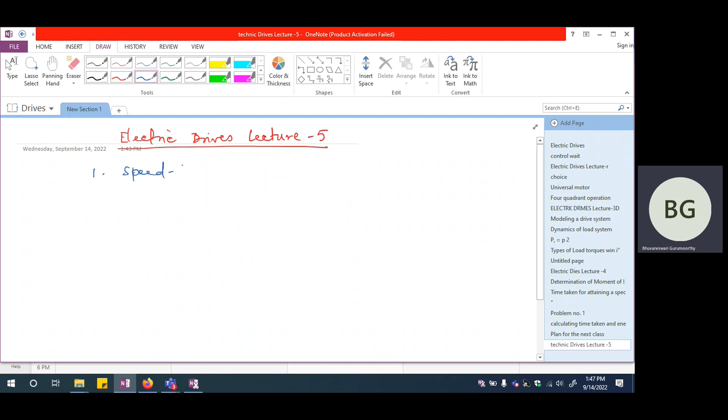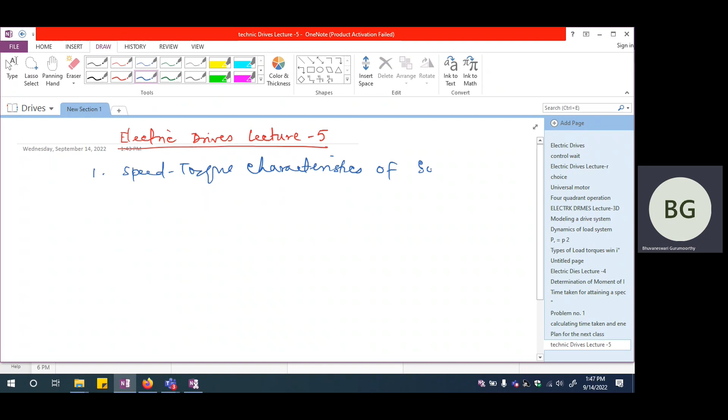We said in the last class that we are going to look at three things today. One is the speed torque characteristics of some practically existing systems, some practical loads. This is the first thing we will look at, because unless we know clearly how load speed torque characteristics behave, we will not be able to exactly meet the needs of that particular load. So for that purpose, we need to analyze what kind of load systems exist in actual practice.

The second thing we are going to look at is stability, basically steady state stability. Let's say a particular system is working at a particular operating point, and if there is a small disturbance occurring in the system, maybe due to a small variation in the load, or in the frequency, or some kind of hiccup in the coupling, in those cases, whether the operating point would be stable, that is whether the system would return to the same operating point irrespective of the disturbance. This can be examined by knowing the load speed torque characteristics as well as the motor speed torque characteristics. We are going to look at that as well.

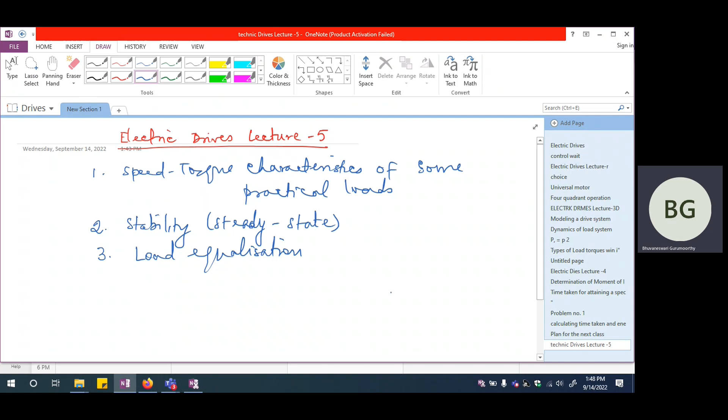And the third thing we are going to look at is something called load equalization. So these are the three things we are going to look at, and this should conclude our discussion on dynamics of the load system.

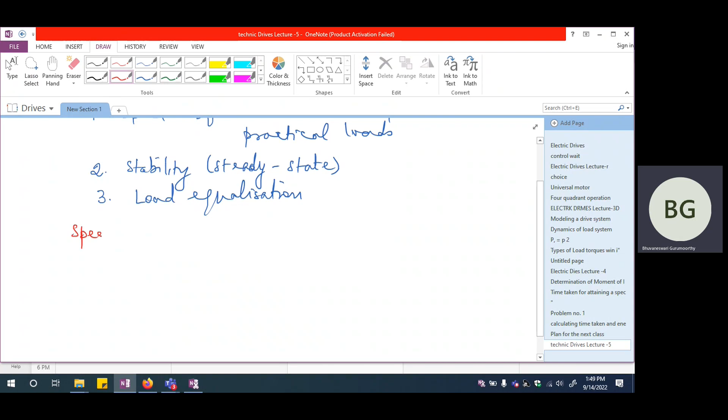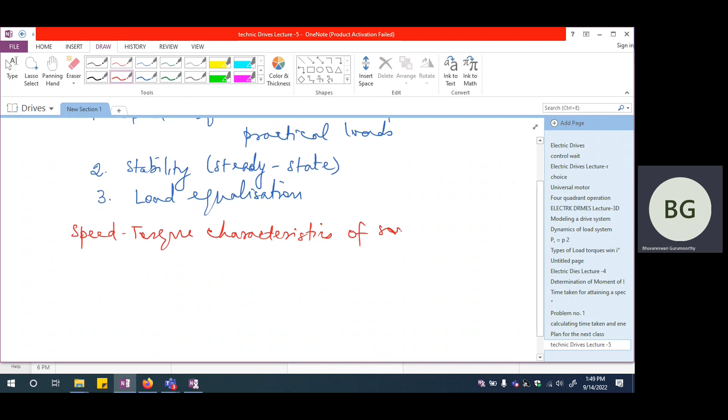So let us try to first of all start with the speed torque characteristics of some practical loads. So we are going to start with this.

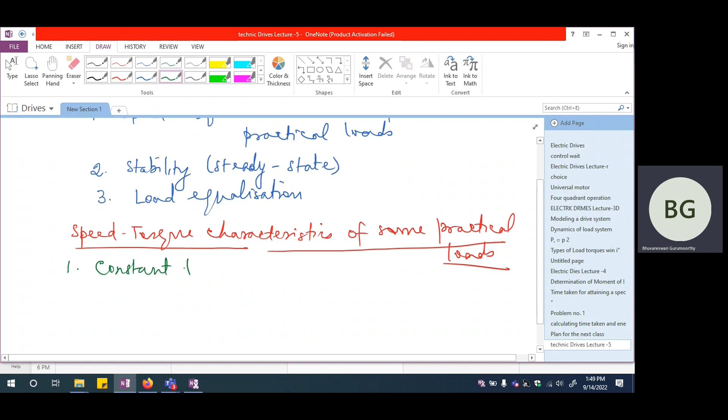We already talked about at least two kinds of loads. One we said is constant torque load, so irrespective of the speed at which the system runs, the torque posed by the load to the motor is going to be constant. Typical examples are gravitational loads, loads being lifted against gravitation, typically a hoist or an elevator, the lift. These are typical examples of constant torque load, because I'm assuming they move at very small speed, so it won't make any variation in the G value, acceleration due to gravity, and we are assuming it is in the Earth's environment. So a hoist lifting weight against gravity, or an elevator or lift, is typically a constant torque load.

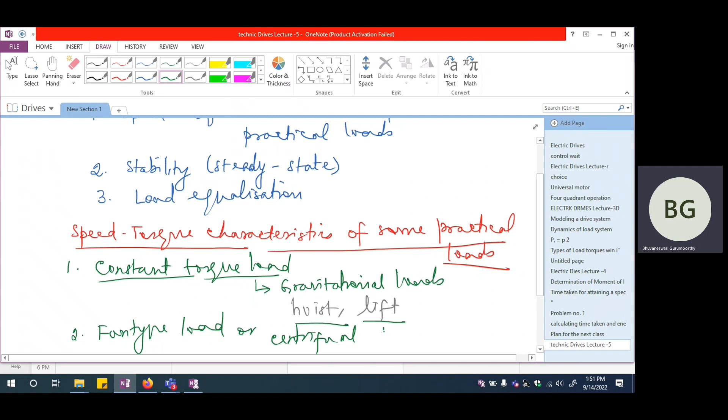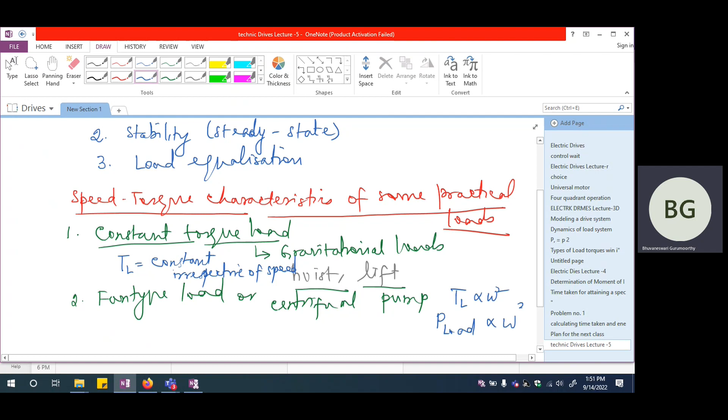Another load we talked about was fan type load or centrifugal pump kind of load. These are two loads where the load torque will be proportional to omega square. Here TL is constant irrespective of speed, since we are always talking about speed torque characteristics, this one is irrespective of speed, whereas this one is dependent upon speed. So the load torque is proportional to omega square, which means the load power is proportional to omega cube, because torque multiplied by omega gives power. So this has to be written as TL multiplied by omega.

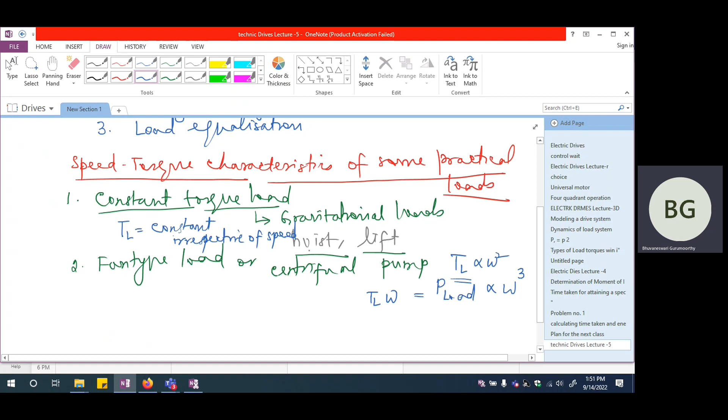Now there could be combinations of these torques. For example, if I look at an electric vehicle or a train which is moving, when you start the train, initially when it has to start moving, you have quite a bit of static friction faced by this load. After that, once the train starts rolling, the wheels start rolling, it comes down. And after that, it might actually increase as the speed increases further, if it's a high speed train, because it has to tear through the wind column and then progress further. So as it moves at higher and higher speed, the torque increases further and further. So if this is the frictional torque, static frictional torque initially, it decreases as the wheels start rolling.

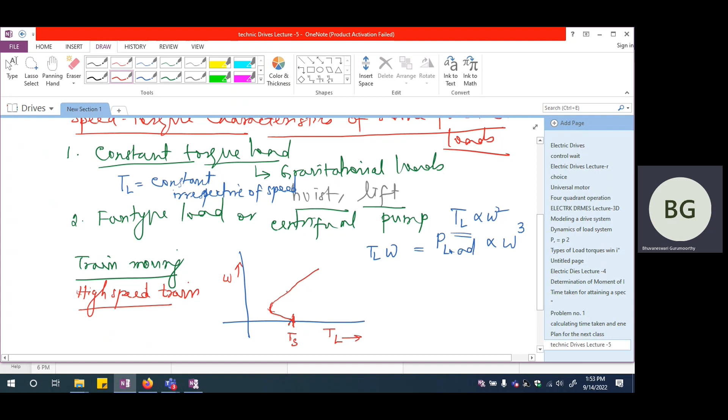And after that, it is going to increase further and further like this. So I should say this is the omega axis and this is the load torque axis.

This will be the corresponding variation of torque for a high-speed train. In the same speed-torque plane, if I plot for a constant torque load, the torque remains constant irrespective of speed. So this is the constant torque load characteristics.

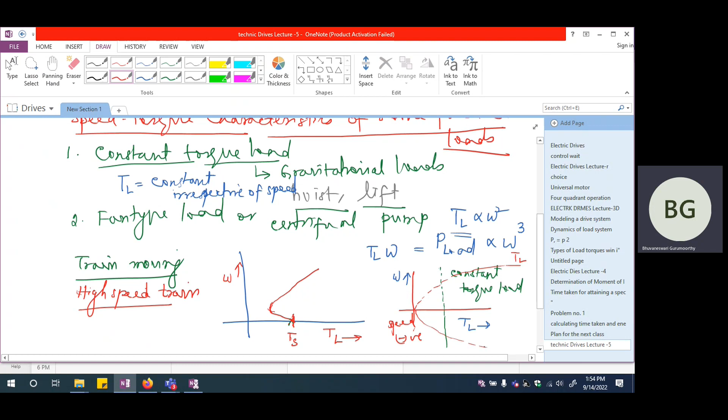Whereas for a fan type load, as the speed increases, the torque increases as the square of that, so it has to be parabolic. I should show it as a parabola. Still the torque will be positive, even though the speed is negative. So I'm going to have this as the load torque for a fan type load.

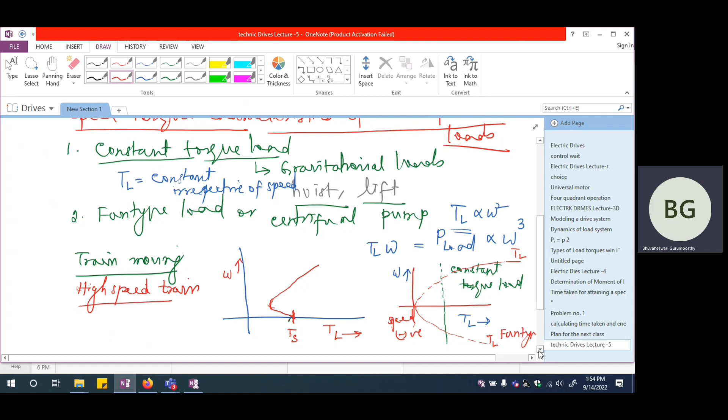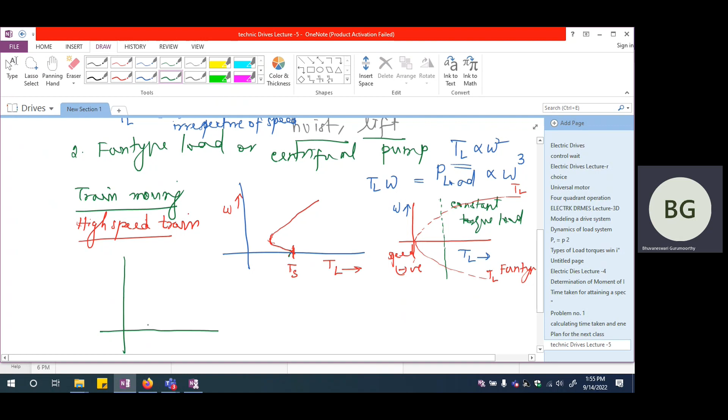Now, if I look at a system like an elevator in Sears Tower, the elevator moves at a very high speed. It has to tear through the wind column and travel fast, because if it has to reach the 112th floor within a couple of minutes, it has to move faster.

If it were just an elevator, I would have constant torque load characteristics, a straight line, TL equal to constant. Whereas the parabolic characteristics correspond to fan type load, which is the kind of characteristics we are going to have.

Now, this is the addition of both, because the elevator's weight is definitely there - the people traveling inside the cage contribute weight. But on top of that, I have to add the torque contributed by tearing through the wind. So I need to add these two together to show the complete characteristics.

So this TL is due to the weight of the cage plus the frictional torque due to the wind column - let me call this windage. Both of them put together give the torque-speed characteristics of a high speed elevator.

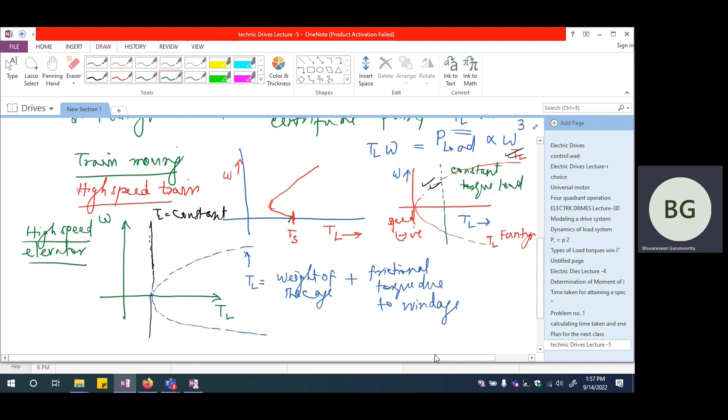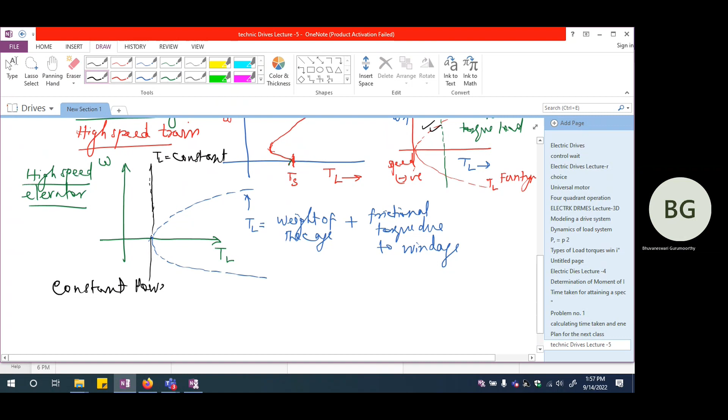There could be constant power loads, typically in a train that is coasting, just moving at roughly constant velocity. In those cases it has already attained a kind of steady state, so the motor has to produce only a constant amount of power. So constant power load is another type of load you may see normally.

In that case, if power is constant, T multiplied by omega is constant, which means TL is proportional to 1 by omega. If this is omega and this is the load torque, I'm going to have something like this - a hyperbolic kind of characteristics. That's the characteristics for a constant power load.

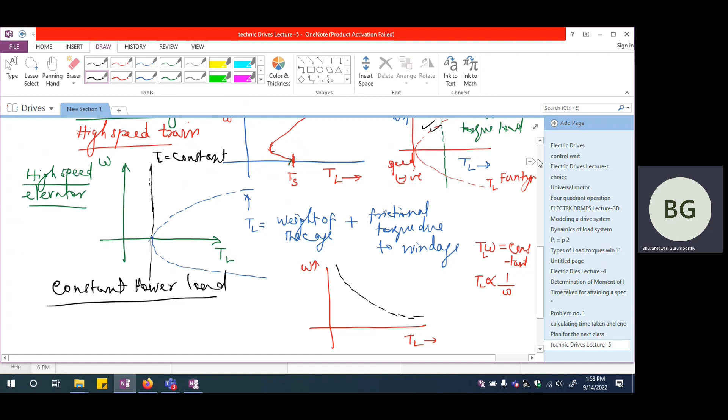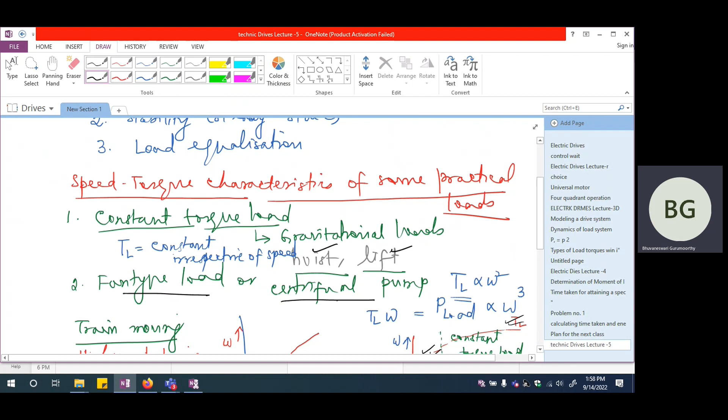So there are different types of loads encountered in real life. We took some of them: one is constant torque load, like hoist and lift, where the torque is constant irrespective of speed. Then the other is fan type load or centrifugal pump kind of load, where the load torque is proportional to omega square.

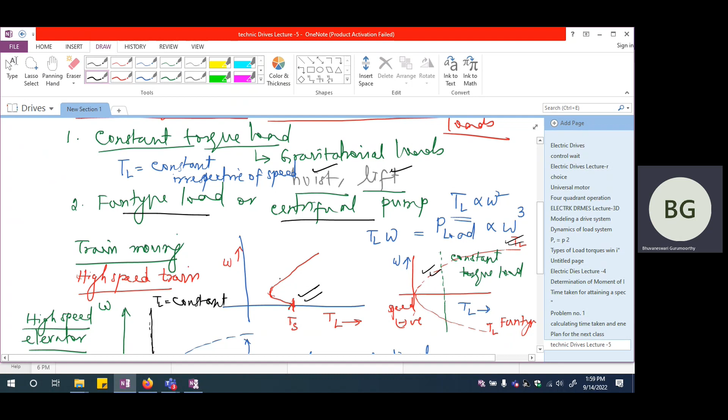Then there's the high speed train, where initially there's a good amount of static friction, but after that the torque demand declines, and then it gets added to the original torque requirement of the train, which is in the form of a parabola because it's a high speed train tearing through the wind column. Another one we talked about was high speed elevator, and finally constant power load. These are different kinds of load torques we may encounter in real life.

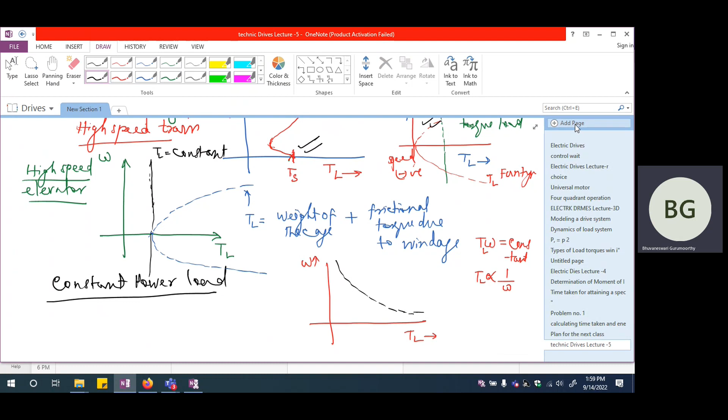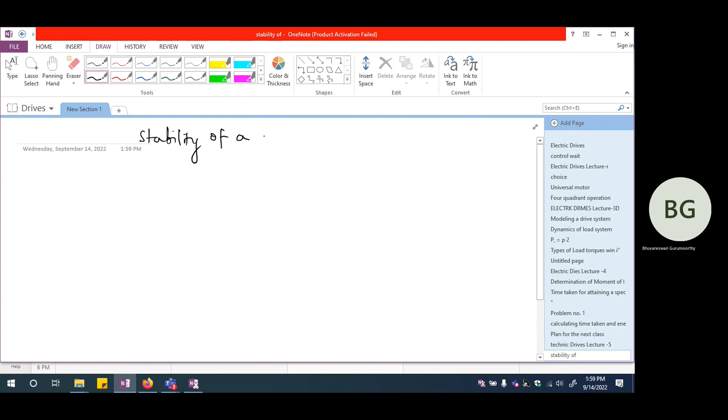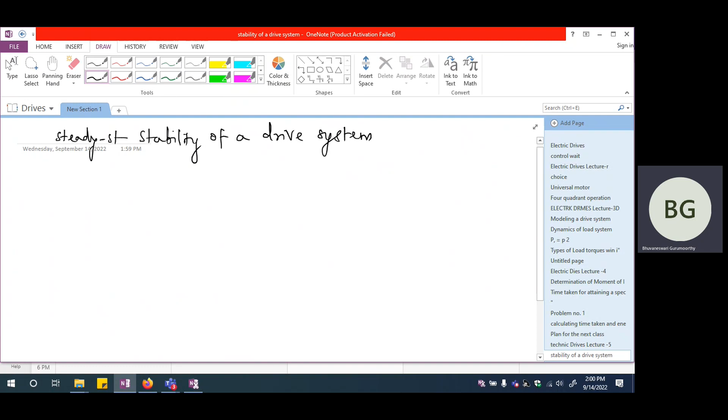So the next thing we are going to talk about is stability of a drive system. This stability is actually steady state stability of a drive system. So we are looking at steady state stability of a drive system.

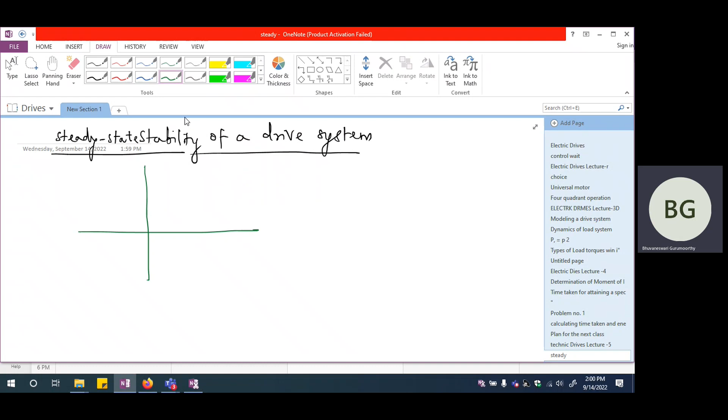So in steady state stability of a drive system, let us first look again at the speed torque characteristics of the load as well as the motor. Let's say this is omega and this is torque. I'm just writing torque because we'll specify whether it is the electromagnetic torque developed by the motor or the load torque demanded by the load.

Let's assume it is a three-phase induction motor. I'm going to draw the speed torque characteristic somewhat like this. So this is the speed torque characteristics of a three-phase induction motor. Let me show this as TE, the electromagnetic torque that is developed by the induction motor.

Now let me draw the load characteristics. Let's take a constant torque load, for example. So let me just draw this as a constant torque load, with a straight line characteristic. So this is TL.

Now, the operating point is where J d omega by dt equals TE minus TL, and this should be 0. When this is 0, that is where you get the equilibrium point obtained between the interaction of load and motor.

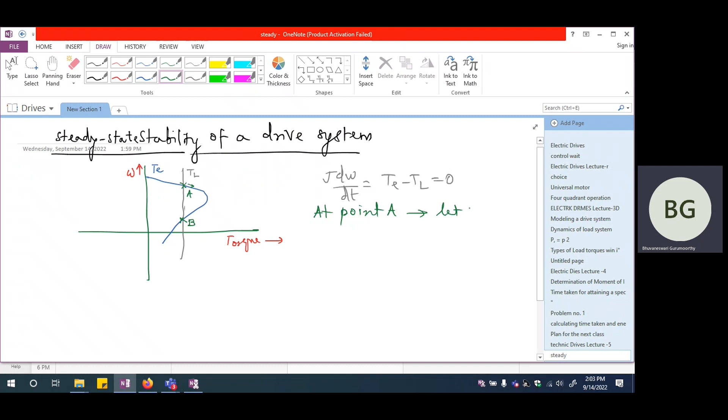Let's say there is a little bit of variation in the frequency. Maybe the frequency has decreased slightly in the grid, because of which there is a little bit of reduction in the speed. So at point A, when the system is operating, let there be a small reduction in the frequency. Obviously the speed decreases slightly, which means it becomes omega minus delta omega. This is the variation in the speed. When there is a slight variation in the speed, let's see what happens to the electromagnetic torque value and what happens to the load torque.

It's a constant load torque characteristic, so TL is constant. Even if the speed changes, TL will not change. But if I look at the electromagnetic torque value when the speed slightly changes, I will have a slight increase in the torque, by a quantity corresponding to delta TE. So TE increases slightly. Now TL remains the same, whereas TE has increased slightly. So TE minus TL is going to be delta TE, which is a positive quantity.

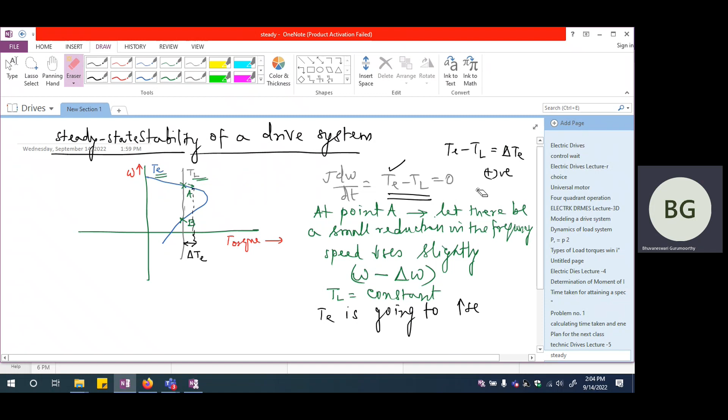If we get a positive quantity, which acts like an accelerating torque, then d omega by dt will be positive, so there will be an increase in speed. This is the direction in which the operating point will travel, so from here slowly it travels towards A. It had moved away from A towards reduced speed, but now it increases slightly because the speed has increased. The electromagnetic torque will get decreased to the original value, which will exactly balance with TL, so it gets back to point A and stays put there.

So point A is termed a stable point, or steady state stable, because even if there is a small disturbance, that disturbance will cause the difference between TE and TL to reach such a value that it drives it back to the original point A itself. That is why it is a stable point. On the other hand, let us look at point B. Let's say at point B we again have a slight reduction in the frequency.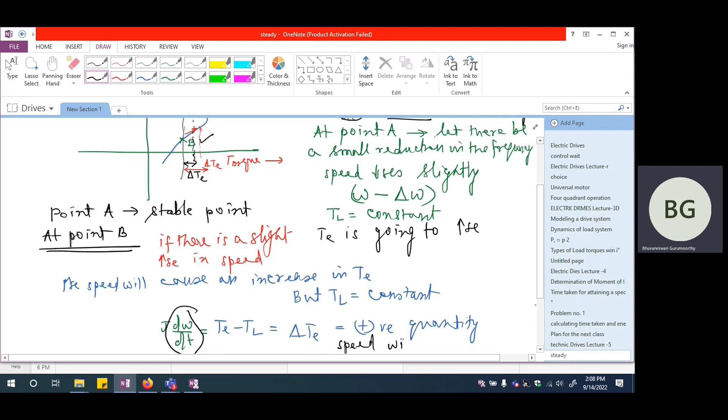Which is going to be a positive quantity. So if this is a positive quantity, corresponding to J d omega by dt, obviously I'm going to have a positive d omega by dt, which means speed will increase further. So if speed increases further, the operating point is going to move away from B. It will not move towards B, rather the operating point will move away from B.

Which means point B is not going to be retraced once again. The operating point is not going to return to B once again, which means point B happens to be an unstable point. So point B is an unstable point, because if there is a disturbance, immediately the operating point is going to be completely disturbed and the system is going to move away.

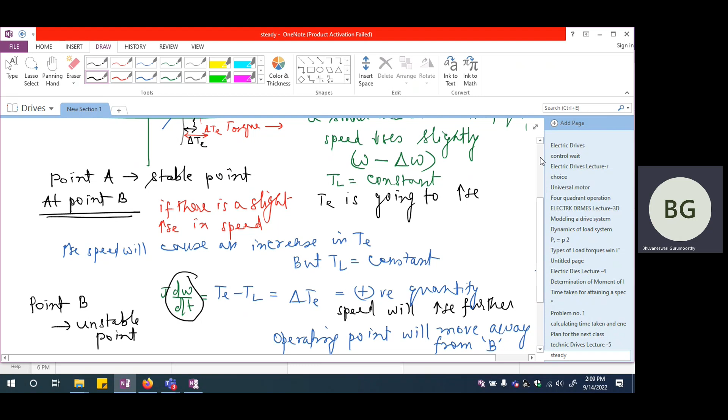So in this particular case, that is how induction motor starting happens, and ultimately it settles wherever the load torque equals the electromagnetic torque itself. That's why in the induction motor we always call the portion from torque equal to 0 to torque equal to T max point the stable operating characteristics, whereas from Tmax to the starting point where omega equals 0, we call this the unstable operating characteristics.

So this portion is generally going to be stable operating characteristics, whereas this portion is going to be unstable as far as an induction motor is concerned.

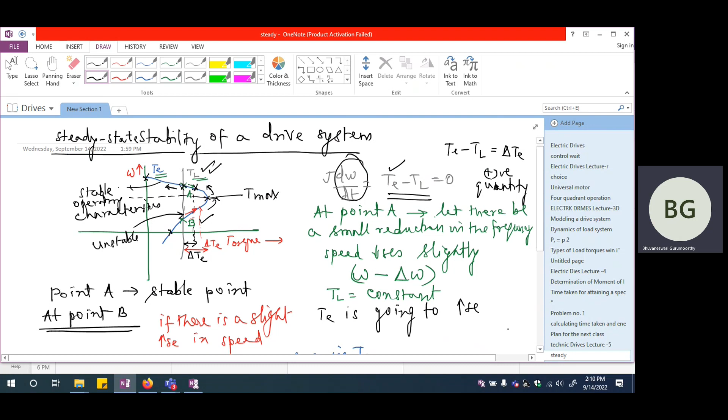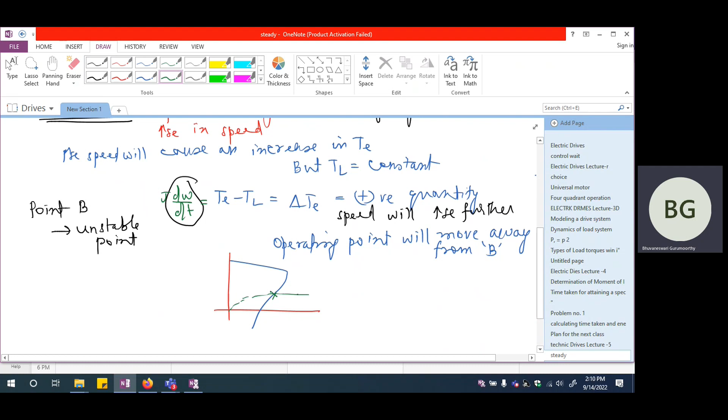But again, the stability or instability is not only dependent upon electromagnetic torque. It also depends upon what kind of load torque I am actually visualizing along with the electromagnetic torque of the motor. For example, even if I have a characteristic of the induction motor somewhat like this, if we have a fan type load intersecting with this end of the induction motor characteristics, which is normally called unstable, you may have a stable operating point coming up even here.

This point B may even be a stable operating point if this is a fan type load. So you need to examine clearly how the load interacts with the motor it is coupled to. Depending upon that, you can say whether a particular characteristic is going to be stable or unstable, whether a particular operating point is going to be a stable operating point in steady state or not.

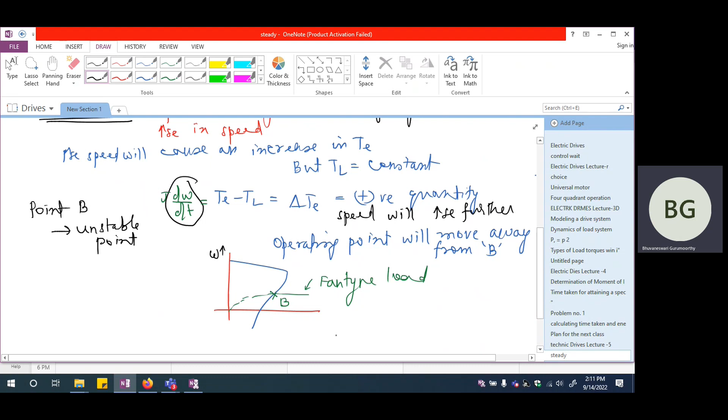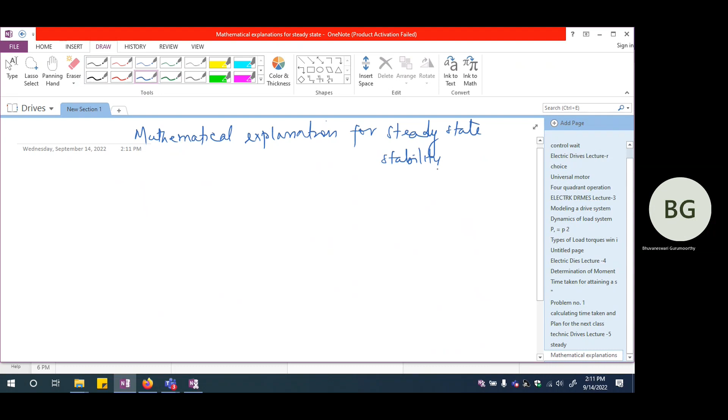So this can be mathematically explained as well. Let us try to give a mathematical explanation for steady state stability. If we are looking at a mathematical explanation, let us first write the original equation, which is TE minus TL equal to J d omega by dt.

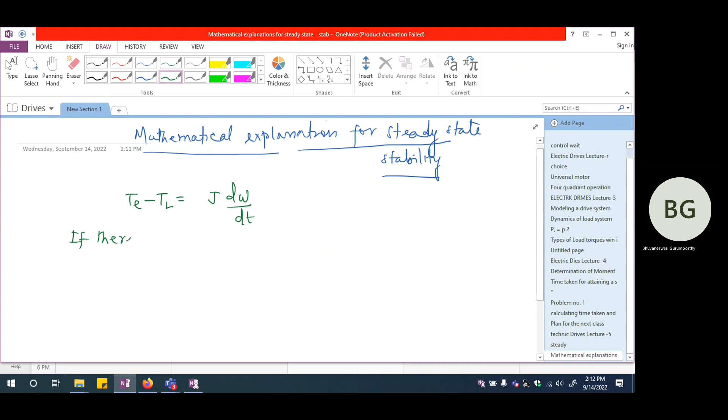And let's say if there is a small disturbance in the speed, corresponding to delta omega. So when the speed changes by a value of delta omega, I should be able to write this as J d(omega plus delta omega) by dt equal to TE of (omega plus delta omega) minus TL of (omega plus delta omega).

So I can say the electromagnetic torque TE changes when omega changes from omega to omega plus delta omega. The incremental change in electromagnetic torque will be dTe by d omega multiplied by delta omega. This is the variation in TE when the speed is disturbed by a magnitude of delta omega. The same way I can say variation

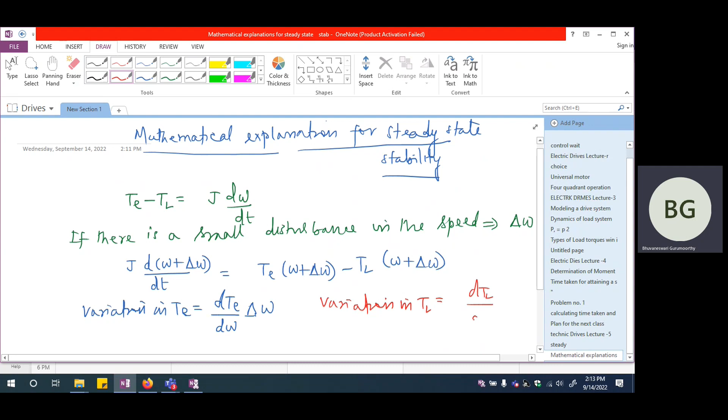in TL, that is also going to be dTL divided by d omega multiplied by delta omega. So when I compare equation number 1 with equation number 2, along with all these expressions for TE and TL, whatever is the delta TL, that is going to be delta TE. So I should be able to write this as TE plus delta TE minus TL plus delta TL. This is equation number 2.

So when 1 is subtracted from 2, I should be able to write this as J d delta omega divided by dt. That should be equal to dTE divided by d omega multiplied by delta omega, and I should write the other one as minus dTL divided by d omega multiplied by delta omega. So I can write this like a first order differential equation in delta omega.

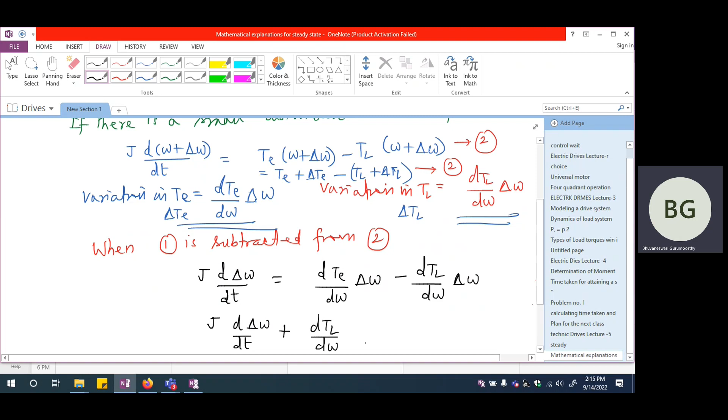So I should say J times d delta omega by dt, and I can bring the entire thing to the other side. So I should be able to write this as dTL divided by d omega minus dTe divided by d omega, multiplied by delta omega, equal to 0. So this is a first order differential equation in terms of delta omega.

So I should be able to write the expression for delta omega as whatever is the initial disturbance in the speed, delta omega naught, multiplied by e power. So the solution for this should be in terms of exponential, e power minus 1 by J multiplied by dTL by d omega minus dTE by d omega.

It is very, very similar to writing L di by dt plus Ri equal to maybe some voltage source. Or if there is no excitation, only there is initial current built up in the inductance, or there is stored energy in the inductance, I can write this as equal to 0.

So for this, generally we write the solution as I of t equal to I, whatever is the initial condition, multiplied by e power minus t divided by tau. Tau is L by R. This is going to be the solution normally we write for this kind of first order transient circuit. The same thing holds good here also.

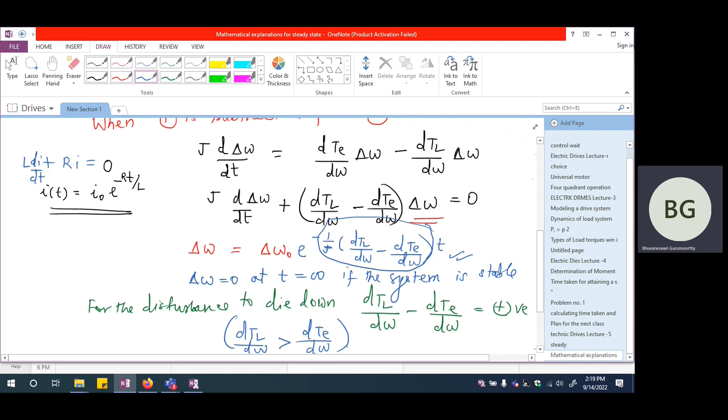So we'll take a couple of systems where we want to examine the stability. Let me just take two characteristics arbitrarily. So let us say this is omega and this is TE. Let me just draw this as the electromagnetic torque, and let me just draw this as the load torque. So I have just shown two characteristics, and let me call this operating point as P. We want to check whether P is stable.

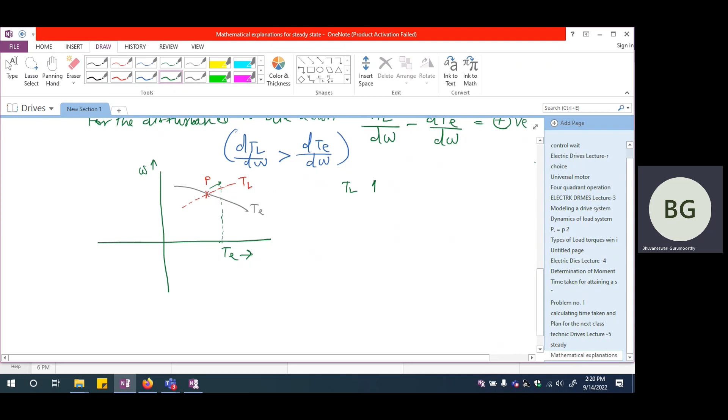Qualitatively, we should be able to examine this. For qualitatively examining this, let me just assume there is a small disturbance in the speed, maybe there is an increase in the speed. So if there is an increase in the speed, if I look at what kind of torque we have, the load torque, if there is an increase in the speed, I'm going to have the load torque increasing. So TL increases if delta omega is positive.

Whereas if I try to look at the same increase in the speed, so this is the speed axis. If I extrapolate this towards the speed axis, very clearly my torque has decreased. So TE decreases if delta omega is positive. If the speed has increased, I can see that compared to what I had as TL, this is delta TL, whereas this is delta TE, which is actually in the negative direction. So obviously, dTE by d omega is negative, whereas dTL by d omega is positive, so dTL by d omega is greater than dTE by d omega.

So this system will be stable.

On the other hand, if I look at a characteristic somewhat like this, this is probably the TE characteristics, whereas I'm going to take something like this as the load characteristic, which is a constant load torque. Let me redraw this. So this is the electromagnetic torque characteristic, whereas this is the load torque characteristic. Let us say this is a constant load torque. I have not really drawn it that way, but assume it's a constant load torque.

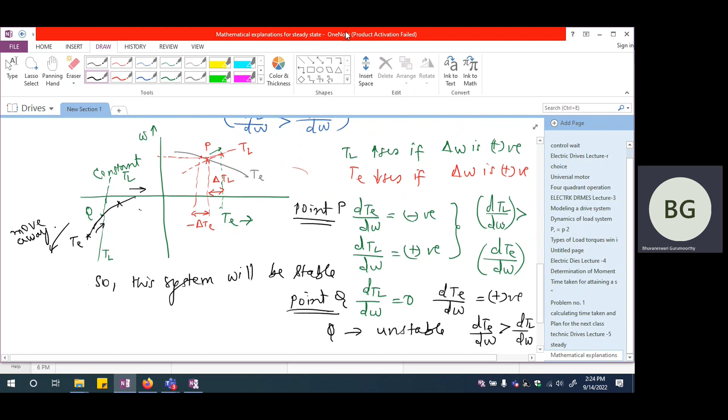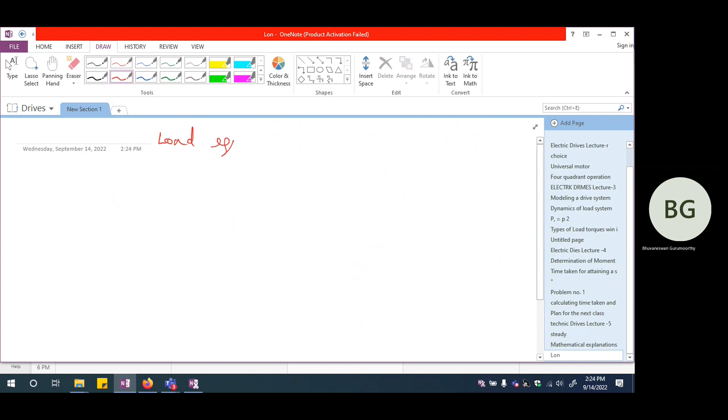So the third point that we are going to discuss today is regarding load equalization. So where is load equalization really used?

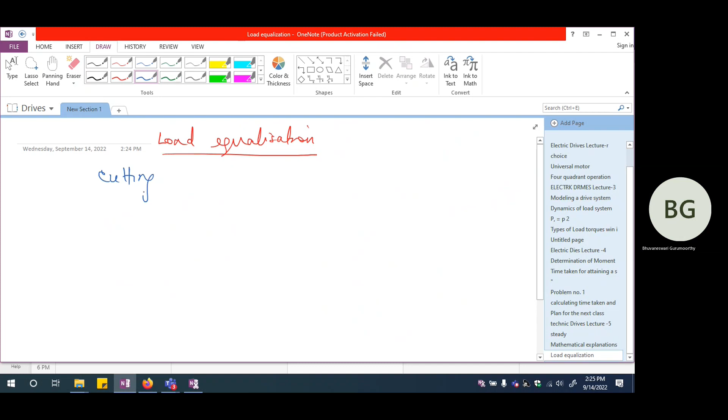Let us assume there is something like a cutting machine, where you have a particular cutter coming down heavily on a material which is going to be cut. This slices it into two pieces. After this piece is sliced, the next piece slowly moves and occupies this position, and this happens one after another. So whenever the cutter is really working on the piece, only then do you have a heavy load torque. Whereas when this piece has to move and occupy the position of the previous piece, the cutting apparatus is not loaded at all.

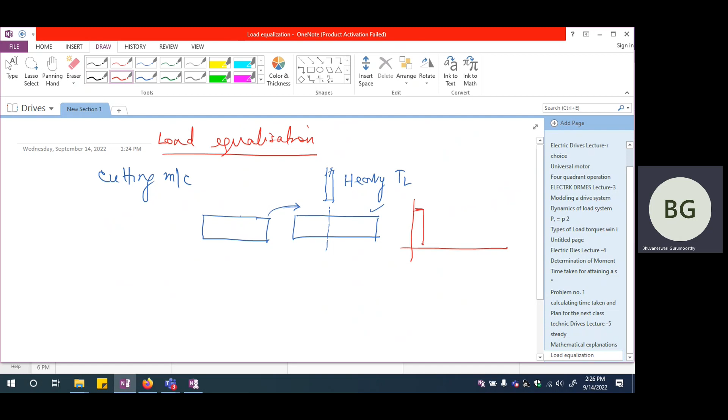So if you look at the load torque in a cutting machine, it is at a very high value for a very short while when it is cutting, and after that it is at a very low value for a long duration. Then again it increases to a high value, then comes down to a low value, and so on. So with respect to time, if I plot the load torque, this is the way it manifests itself. Let me call this TL max and this TL minimum.

If I employ a motor capable of developing TL max, we are going to underutilize the machine, because that machine will be utilized to its fullest capacity only for a very short duration. This short duration, let me call TH, the heavy load duration, and this duration TL, the light load duration. So the light load duration is long, whereas the heavy load duration is short, so the motor will not be utilized to a large extent at all.

If I am able to store the energy during this light load period in some kind of arrangement, something like a flywheel, then I should be able to release that energy from the flywheel to the load when the load is really coming down heavily on the drive system.

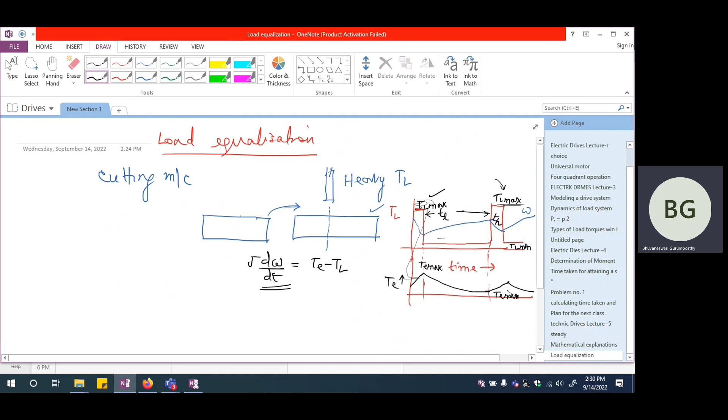So this is going to be TE, which is developed by the motor, whereas this is TL max, and this is TL minimum. Let me call this TE max, and let me call this TE minimum. So the electromagnetic torque of the motor varies only from TE max to TE minimum, whereas the load torque varies over a wider range, which is TL max to TL minimum.

So a flywheel can be employed. A flywheel is basically another heavy duty wheel which will also rotate along with the motor shaft. Because it has a very heavy weight, half J omega square of the flywheel is going to be quite high, since the moment of inertia of the flywheel itself is going to be high. So the kinetic energy stored in the flywheel is going to impart its energy to the load mechanism whenever there is a shortfall in the torque developed by the motor.

Essentially it will be somewhat like this. If this is the motor, and let us say this is the load to which the motor is imparting power, this is the shaft coupling these two. In between, I'm going to employ a large flywheel. The flywheel I can show in the elevation, it is somewhat like this. So this is going to be a flywheel. But in actual practice, a flywheel is going to be like a big wheel, having spokes which are pretty thick.

So this is the flywheel. This is going to be really big and heavy, and that is the reason why it is able to manage the shortfall or excess in the torque.

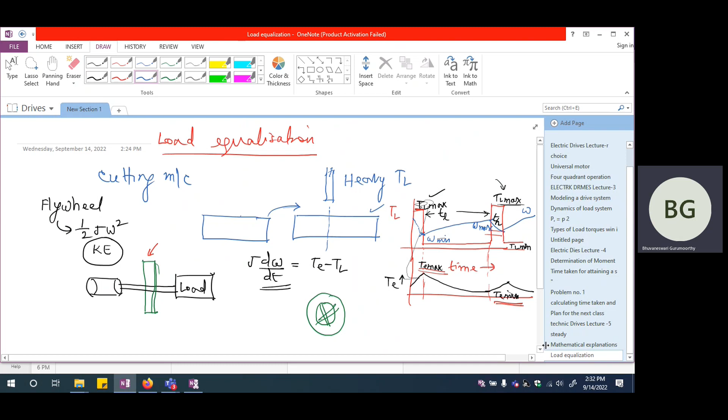This is the question at hand. So, for limiting the electromagnetic torque variation from TE max to TE minimum, and also to limit the speed variation from omega minimum to omega maximum, when the load torque remains at TL max for TH seconds and TL minimum for TL seconds, what should be the moment of inertia of the flywheel?

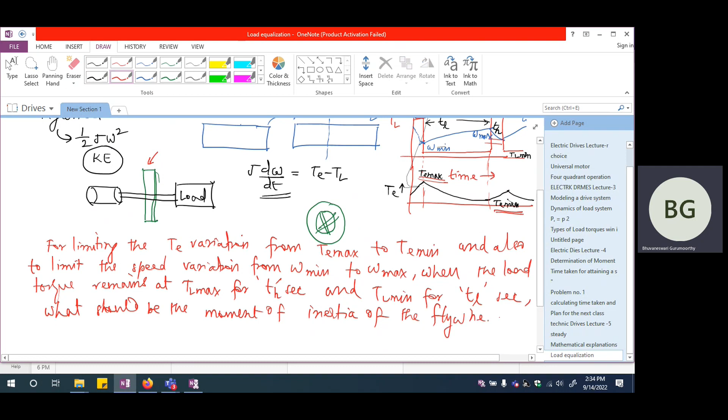So we are looking at load variation very clearly from TL max to TL minimum. TL max persists for TH seconds and TL minimum persists for TL seconds.

Let me first say that my motor has a characteristic somewhat like this. In most cases, whether it is a separately excited DC motor or induction motor, this is the kind of characteristic we are going to have for the motor. So this is omega and this is going to be TE.

If I am looking at the no load condition speed, this is going to be omega naught. Whereas if I am looking at the rated condition at which it is developing rated torque, under that condition I am going to have the speed to be something like omega r. So the speed would have fallen from omega naught to omega r. Omega naught is the no load speed, omega r is the rated speed.

So I should be able to write the torque at any other point in between these two. If this is the torque at any other point, I should be able to write the speed at this particular point as omega. So omega should be equal to omega naught minus whatever is the slope of this line, which is omega naught minus omega r divided by TR.

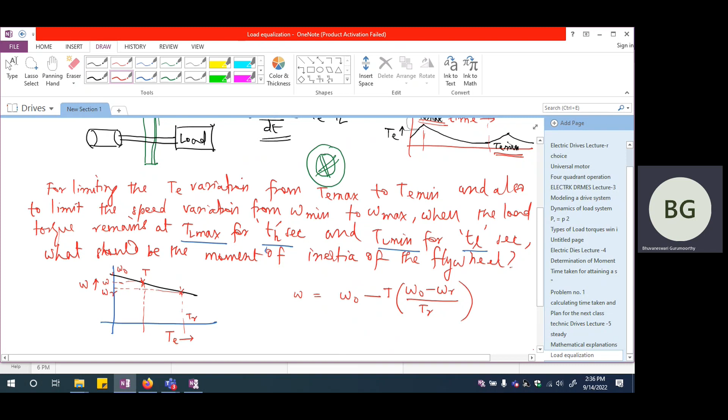So this is going to be the speed of the motor at a torque of T when the motor is delivering a torque of T. So now I should be able to write this as d omega divided by dt, which is a constant, as minus dTe by dt multiplied by omega naught minus omega r divided by tr, where Te is the electromagnetic torque.

Now if I try to multiply this by j on either side, I should be able to write this as j d omega by dt equal to minus dTe by dt multiplied by j multiplied by omega naught minus omega r by tr. But j d omega by dt we know is Te minus TL, this is the original equation we have always written for the mechanical system.

So if I try to call this entire quantity as mechanical time constant tau m, I should be able to write this as tau m multiplied by dTe divided by dt plus Te equal to TL.

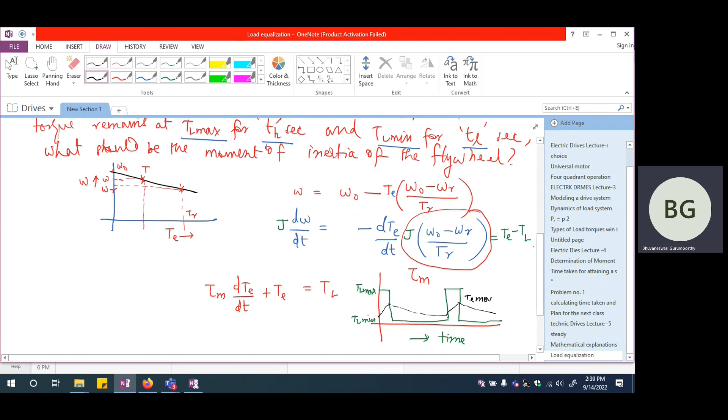Now at the same time, if I try to look at the electromagnetic torque, we already drew this if you may recall. Electromagnetic torque is slowly increasing here, then it is going to decrease, and again it will increase and decrease and so on. So this is going to be TE max and this is going to be TE minimum.

Now this is a first order differential equation, so we should be able to write the solution clearly for this. We should be able to write TE of t with respect to time as whatever is the steady state torque it might achieve multiplied by 1 minus e power minus t by tau m, plus whatever is the initial torque it had multiplied by e power minus t by tau m.

Again, I'm writing the solution from the original equation, Ri plus L di by dt is equal to some VDC. For this, generally we write the solution as I of t is equal to the steady state current VDC by R multiplied by 1 minus e power minus t by tau, plus if there had been an initial current, I initial multiplied by e power minus t by tau, where tau is equal to L by R, the time constant.

So the same kind of solution we are going to get for the electromagnetic torque also here. So the duration for which heavy load is applied is TH, for which the light load is applied is TL. So I have TH and TL.

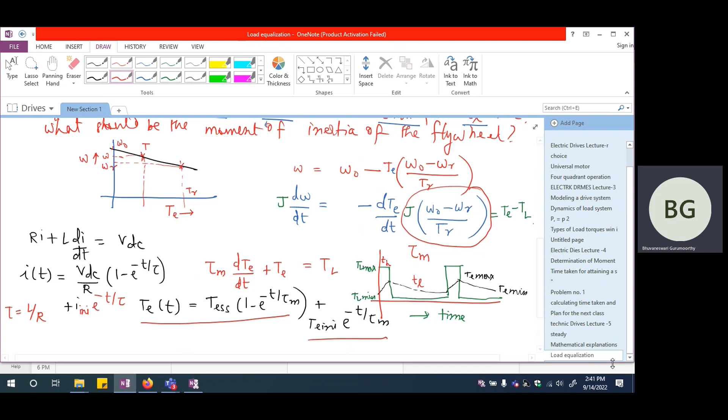So now I should be able to write this corresponding to, if I just start from 0 and reach until TH, if I had allowed this particular high load for an infinite duration, hopefully the motor should have reached TL max in steady state. So for the duration TH, if I try to write the solution, I should say TE at the end of TH, which is actually TE max, is going to be equal to the steady state torque, which would have been TL max multiplied by 1 minus e power minus TH divided by tau m.

Plus what was the initial torque? The initial torque would have been TE minimum, because it is going from TE minimum to TE maximum. So TE minimum multiplied by e power minus TH by tau m. Please note that this point is TE minimum and this point is TE maximum. So TE maximum equals TL max multiplied by 1 minus e power minus TH by tau m, plus TE minimum multiplied by e power minus TH by tau m.

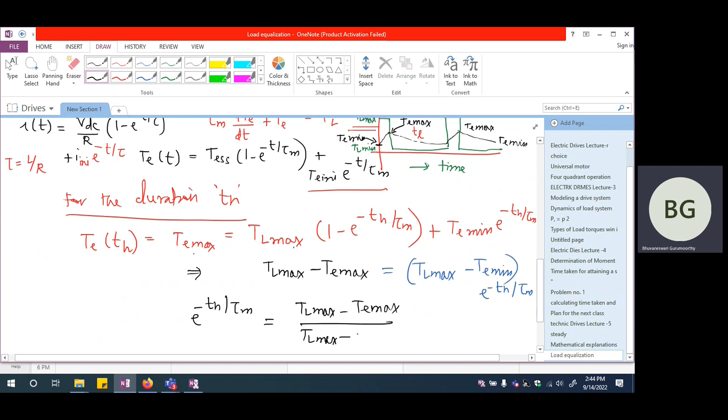So I should be able to write this as e power minus TH by tau m equal to TL max minus TE max, divided by TL max minus TE minimum. So I should be able to write e power TH divided by tau m as the reciprocal of this: TL max minus TE minimum, divided by TL max minus TE maximum.

Now let me take natural logarithm on both sides. So I should be able to write this as TH divided by tau m equal to natural logarithm of TL max minus TE minimum, divided by TL max minus TE maximum.

Now from this, I should be able to say tau m, which happens to be J multiplied by omega naught minus omega R divided by TR. So I should be able to write this as J multiplied by omega naught minus omega R divided by TR. That should be equal to TH divided by natural logarithm of TL max minus TE minimum divided by TL max minus TE maximum. So if I know what is the maximum torque that can be developed by my motor,

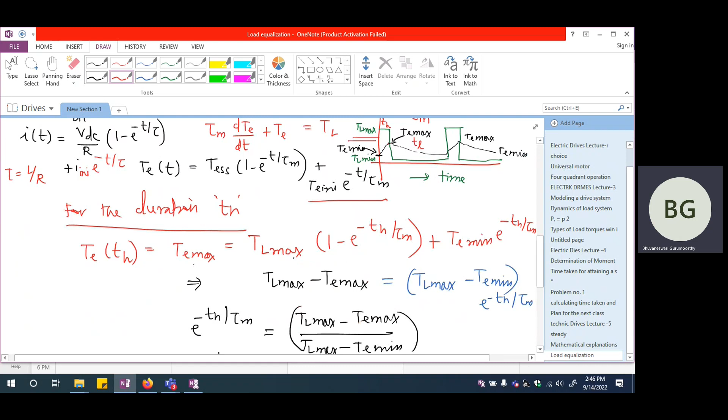Okay, a similar derivation should be possible. What we have done is for duration of TH. A similar derivation can be done for TL duration.

Please do it yourself, I'll just give the result. So the result corresponding to the TL duration is again tau m, which is equal to J times omega naught minus omega r divided by TR. That will be equal to TL. This is corresponding to the light load condition duration.

So this is TL divided by natural logarithm of TE max minus TL minimum, divided by TE minimum minus TL minimum. Okay, so these are the two expressions: one based on light load duration, the other based on heavy load duration.

One of these two expressions will allow us to calculate exactly the moment of inertia of the flywheel, which is needed for maintaining the electromagnetic torque developed by the motor within TE max, and the speed variation within a certain interval, for heavy load being applied for a duration of TH and light load being applied for a duration of TL, where the variation between heavy load and light load is very, very large.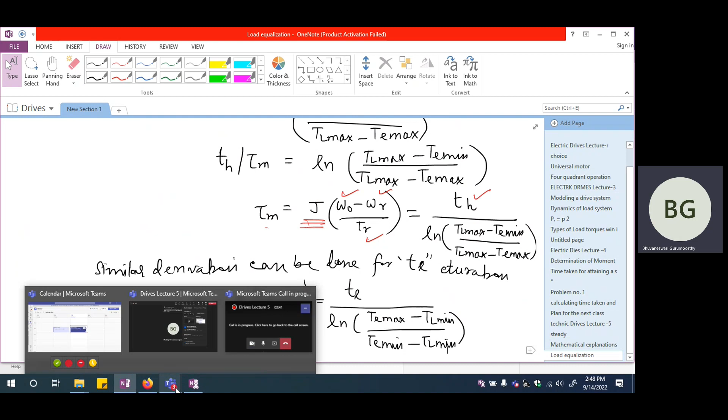Okay, so based on this expression, we will do a problem tomorrow. We would be doing the problem in the next class, but please do the derivation corresponding to the light load condition as well, which I have not done. Okay, so we will meet in the next class.